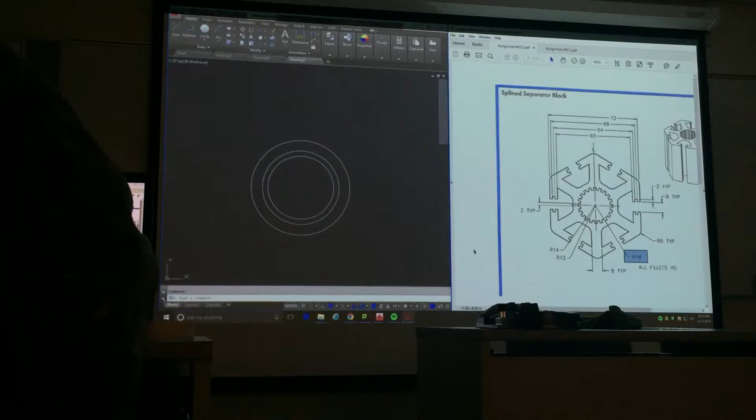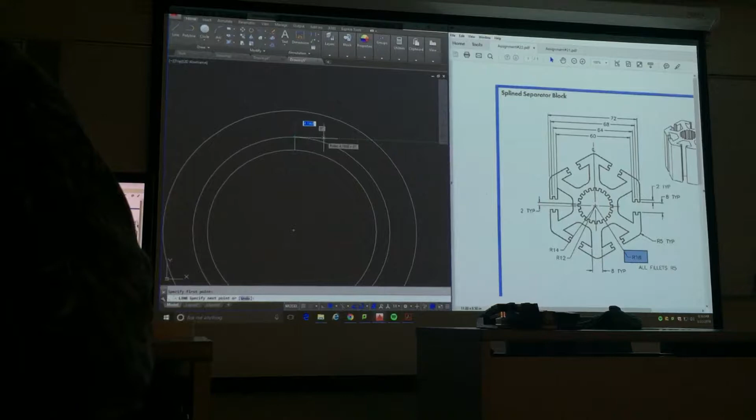Past that, the way I would do this is I would draw these guys for the teeth. There's a variety of ways you can do it. Some people go from the end of this guy out one in each direction, because they tell you that the tooth right here is 2, all the way over to this guy. They tell you that dude is 2. And it's typical, so it means every tooth is 2. Anytime you see that TYP, that's going to be typical.

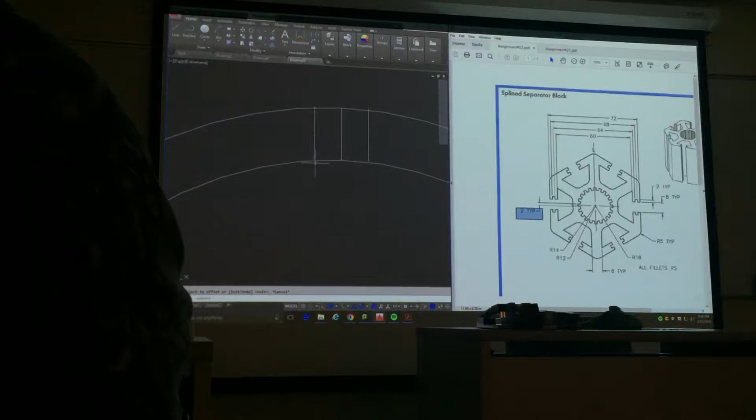So as you're doing this, you could just draw over, that's fine. The way I did it is I offset that guy. I don't know that one is better than the other, it's fine either way. But I did an offset of 1 in each direction. The downside of doing it this way is you can't really control the height of this, so it can give you some trimming issues, because this line, as you can see, does not breach that circle.

So in that case, I need to elongate that guy a little bit. I'm just going to drag that and make sure those cross. Are you using the extend command? You could use extend - for the time it takes, I usually just grab the grip and drag it down, but some people love extend. I think it's the same amount of time, really.

So as I'm trimming this thing, I'm going to trim off these guys, top and bottom, and trim off these guys as far as the teeth, and then the outside of the circle, so I get one tooth. I don't really need that dude because that's just a layout line, I'm just measuring up with that.

At this point, I would array this around. So I'm going to go polar array, select these guys, enter because I'm done selecting, and choose my center point. For this thing, there are 20 of them - I'm sure you counted - so I'm going to array those guys.

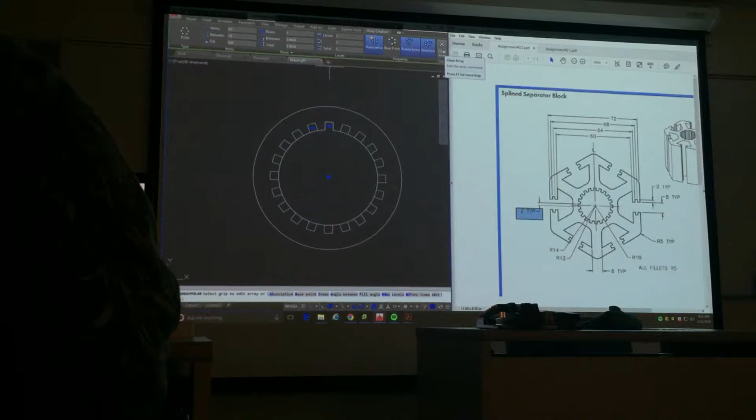At this point I would close the array, but I need to trim these - I need to take the chunks out of them. So instead of closing it and then clicking on it and reopening it, I know I'm going to go on to the next step, and then keep clicking these guys to trim that.

Just to fast forward that, I made this one, just because you don't want to watch me trim. So once you're done with this thing, I have this all trimmed out, and I'm going to start focusing on this guy right here.

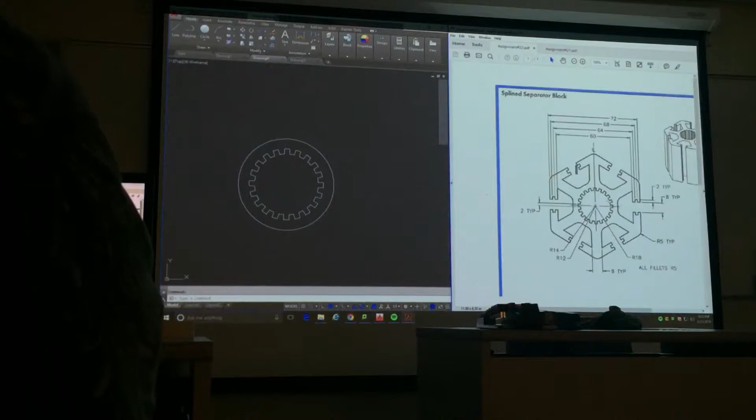This thing you could do a variety of ways. I looked at this from the print reading standpoint. I know that I have a gap here, and I think you'd agree that's at 0 degrees, straight across. Then I know I have another gap here, and as I keep going, there are 6 of them. Would you agree with that? 6 gaps, if you will. So I know that if I have 360 degrees and I'm dividing it by 6 gaps, they are every 60 degrees.

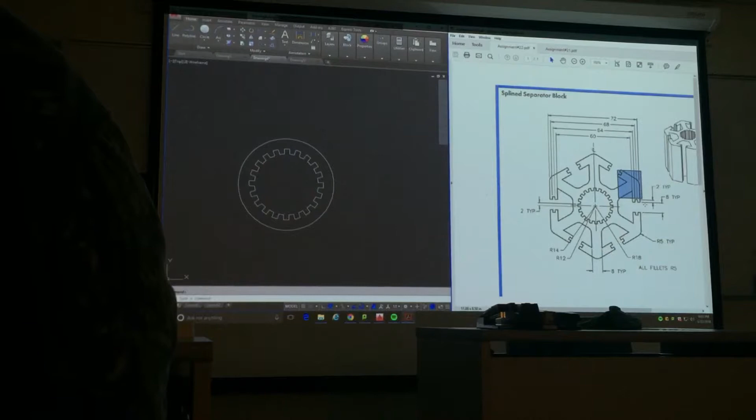So my gaps are at 60, which means that this guy is dead in the middle of 2 gaps. So the center of this is at 30 - does that make sense? There's other ways to do it, but that's the way I did it, you don't have to, but I think it's pretty easy.

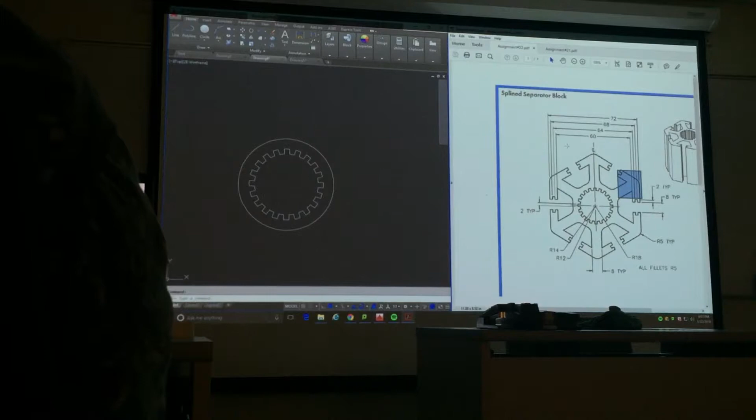As I look at this, I know that there's 6 arrows and 6 gaps. So if every gap is at 60 degrees, then every arrow falls halfway between. Again, you don't have to do it that way, but that's the way I did it. So I'm going to set my polar snap at 30 degrees, and I'm going to pop this guy out.

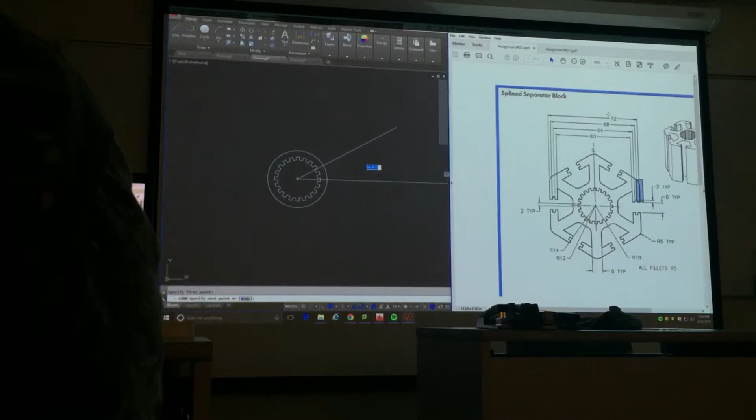Somewhere out there, I know that's going to be the center of my arrow. I also know that this guy right here has a space that I'm going to utilize a line for layout. I need to know how long this area is, and they tell me it's 72 overall. So 72 divided in half is 36 from the center point.

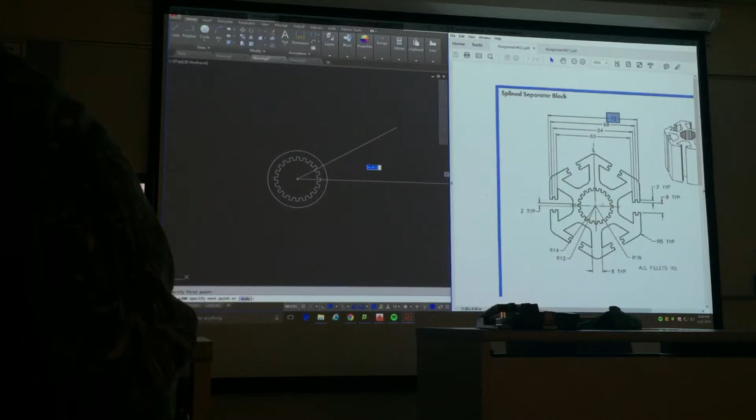I hope you get where I'm going with that. They tell you this overall dimension is 72, but I'm working from the middle, so I'm going to draw this 36. So this line I'm drawing, I'm going to go out 36, and then straight up somewhere.

I have no idea where, but that's going to be the center of this guy. They tell you the offset of that thing is 8, so I'm going to offset that 4 above. So I'm going to offset that guy 4 above. I just did that right there. See it? I was at the center and I went 4 up.

So this line you see is actually that area highlighted blue. It doesn't have the notch, but it's the line. That's the way I handled that. At that point, I don't need this guy anymore. I hope you agree that was just for layout.

So from here, if you want to clean it up to make it look good, you can trim that guy off. I don't really need it for anything, and I also don't need any of this. Some people just choose to leave it, but...

So from this corner, which is actually this corner right here, that guy, I'm right here now, okay? And they tell me that this little notch is 2 up. Well, it also happens to be, if I subtract 68 from 72, I get 4, but divided again by 2, because I'm only working on half.

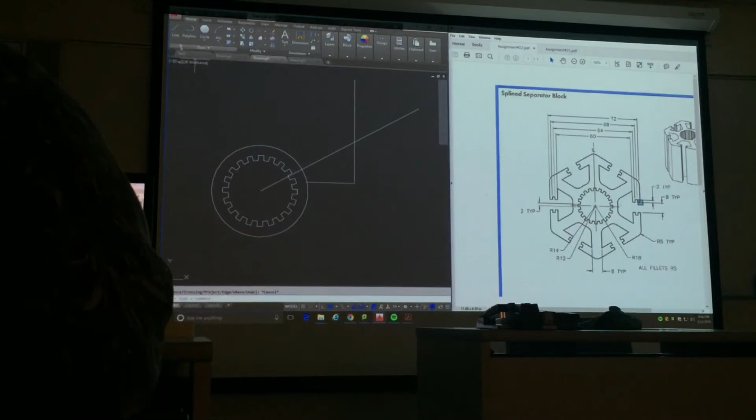So the notch starts out like this. I go over 2, and I lock on ortho for that guy, then I go up 2. Did you make that over... 2. And I'm going to do all of that guy, and as soon as I go over 2, up 2, over 2, down 2, over 2, the inside is going to be straight up again, right where it hits this line.

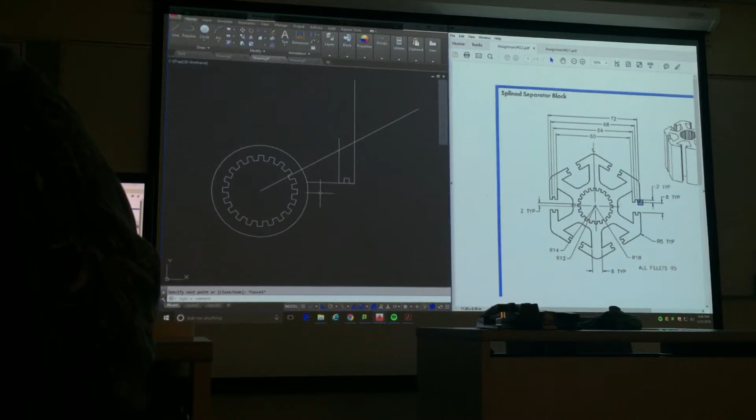That's going to be the center. Okay, what was your question? That one line is 45, right? 30. That's right. Okay, so now I don't need that layout line.

This is this guy. So again, I'm going to offset this guy. It tells me that the arrows are all 8, right? So I'm at the midpoint of the arrow here. I think we agreed that's my 30-degree line.

So I'm going to offset from that guy 4, that's half of the 8, and I'm going to go this way. At this point, I don't need that line anymore. That was just my midpoint.

I'm going to leave that just for a second, because you'll see in a minute here. I'm going to trim this guy, and you're going to kind of see it develop here as an arrow.

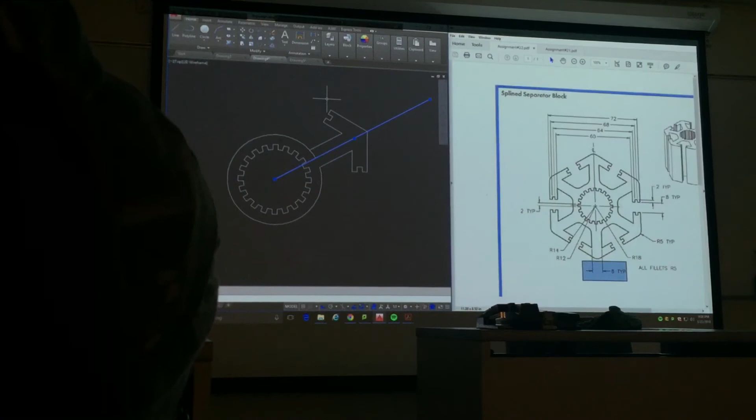So now I have that guy. Apparently I didn't trim that right. So it tells me all of these fillets are 5. So I know that this guy right here is 5, this guy right here is 5.

So I'm going to just give those a radius of 5, and it's going to look something like that, okay?

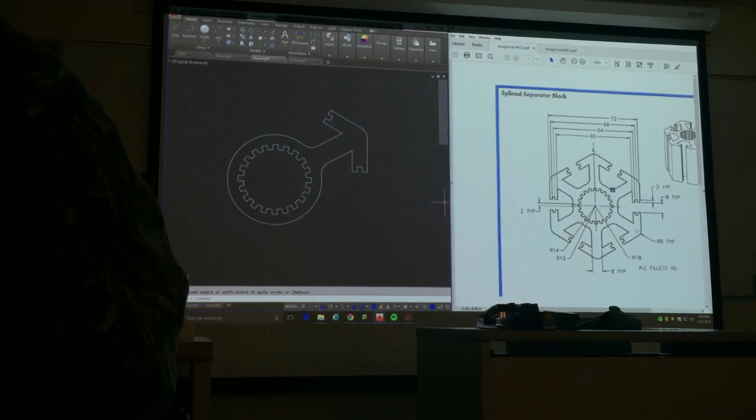So at this point, I also need to give this a radius of 5, right? Because they told me this outside one is also 5 typical. So I'm going to do that.

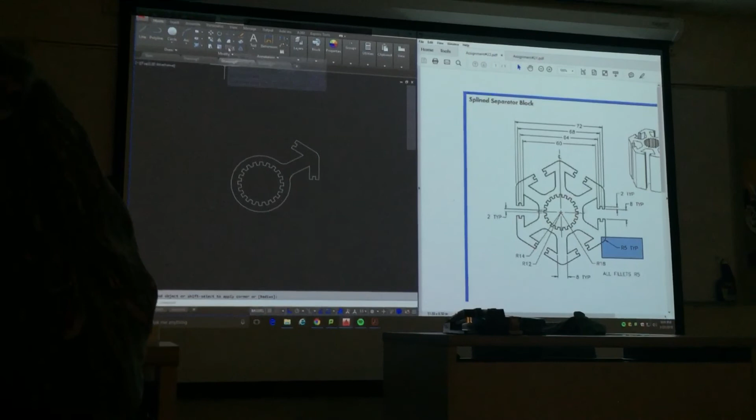All of this guy, and I'm pretty much ready to array this at this point. So I'm going to array, and I'm going to choose all of these guys—make sure I get as many as I can here. Enter. I'm going to go around that center point, and I'm going to get something that looks like this.

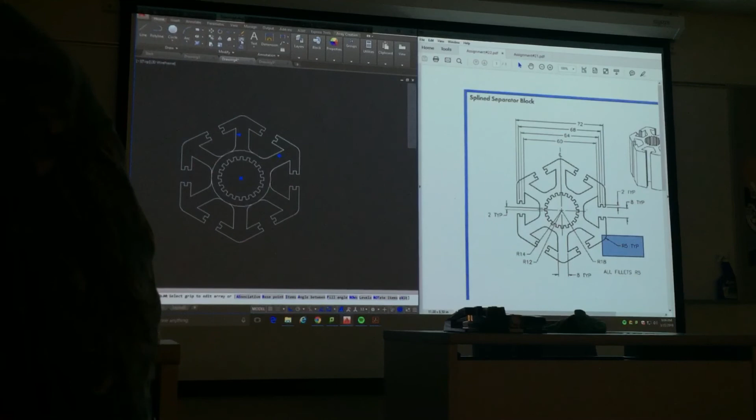I'm going to, again, while it's selected, explode that because I need to be able to trim it. If you remember, we talked last week that you have to explode these guys in order to trim them. So I'm going to just pop these guys out of there, and then I get something that looks like that.